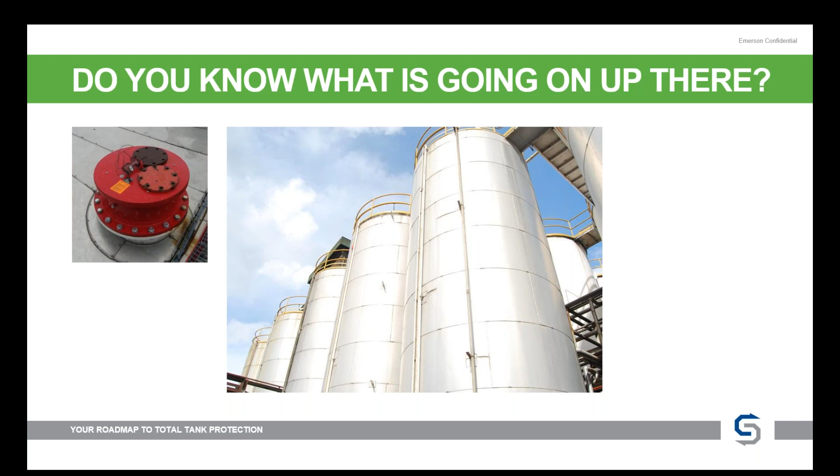All too often we find these devices are orphaned. They're set up and then not part of any formal maintenance program. Measurement needs to be accurate. You need to be confident in each one of your measurements. If they fail, you can overflow your tanks.

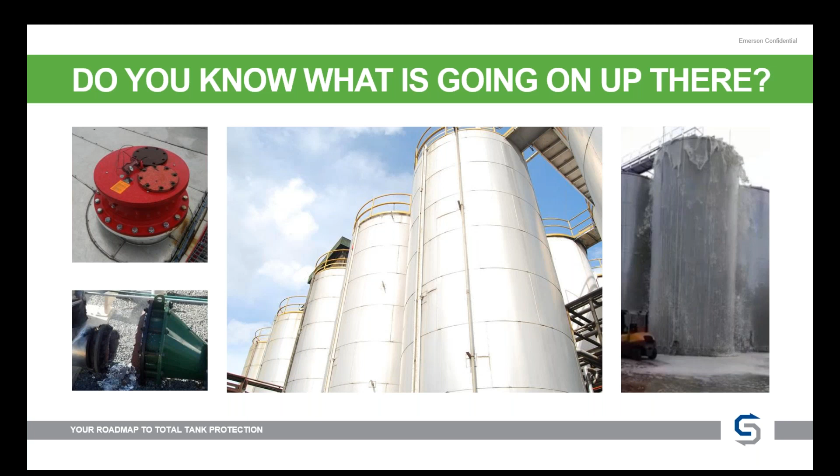Some tanks or applications also require special equipment like flame arrestors or tank blanketing equipment. All these devices must work together to meet the operational and safety needs of your tanks and your plant.

Before we talk about tank top devices, we must first know what type of tanks are out there. There are 3 types of tanks: open top, fixed roof, and floating roof. The important difference is as we move from open top to floating roof, we ultimately improve safety and reduce product loss by controlling or trying to eliminate the vapor space in the tank. However, as we move from left to right, the cost of the tank does increase.

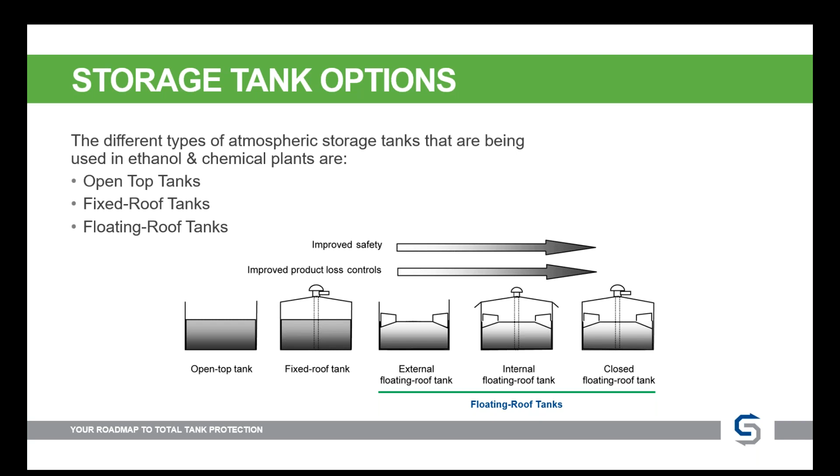One of the most common types of tanks is a fixed roof tank. By putting a roof on a tank, we can keep the elements like rain and snow out of the tank, but we must now somehow control the vapor space within the tank. If the products in the tank are non-hazardous, then maybe a simple hole with a rain cover would do. However, in most cases, we want to keep our products from evaporating, and therefore pressure control devices are required.

Typically, this is the type of tank we expect to see in fermentation. Some plants, however, do use this type of tank as their product storage tank.

Internal floating roof tanks are designed to keep the vapor off of the tank. In order to control the vapor space between the floating roof and the fixed roof, large vents are installed on the top edge, and natural drafts remove any vapors. Typically in the ethanol industry, we see this style of tank used for final storage and storage of flammable products.

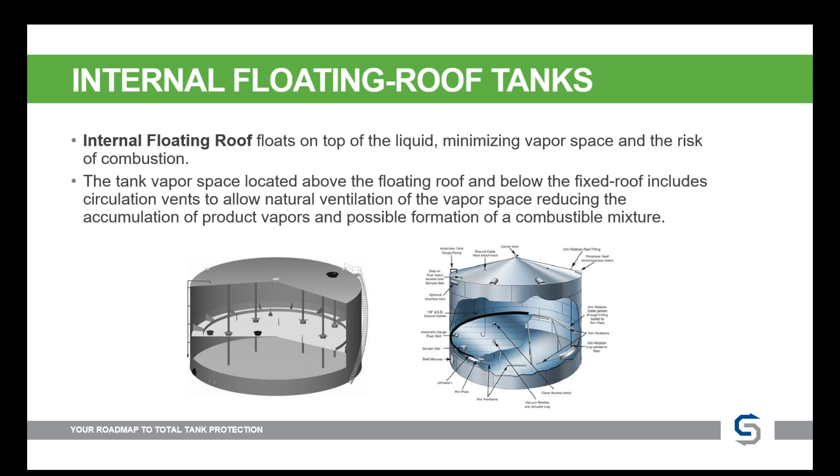Today we will focus on fixed roof tanks. Open-top tanks and floating roof tanks don't require as many protection devices.

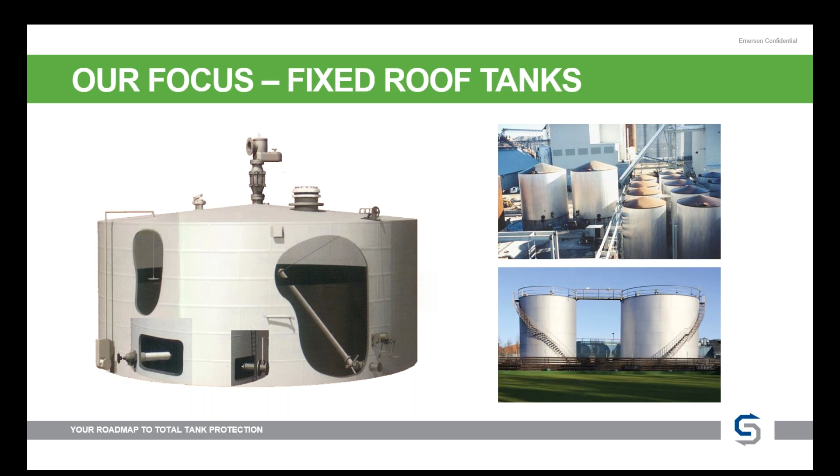When it comes to sizing, there are a couple of terms that are useful to understand. These are in-breathing and out-breathing. Out-breathing is when the vapor space heats up and expands, or when the liquid is pumped in. This raises the tank's pressure, and the tank needs to breathe out, thus the term out-breathing. We also need to consider the expansion due to the fermentation process.

In-breathing is when the vapor space cools down and contracts, or when liquid is pumped out. This lowers the tank pressure, and the tank needs to breathe in, thus the term in-breathing. These are the things that we consider when we're sizing conservation and emergency relief vents, but the calculations are determined by the API standards.

There are many different standards for atmospheric or low-pressure storage tanks. API, American Petroleum Institute 620, is most commonly used. This covers the design and construction of large welded, low-pressure tanks. Temperature ranges from -325 degrees Fahrenheit to 250 degrees Fahrenheit, and pressure up to 15 psig.

API 2000 covers venting atmospheric and low-pressure storage tanks. API 2000 guidelines help to determine how to size pressure relief devices to ensure safety. This is the specification that we use when we size pressure relief devices.

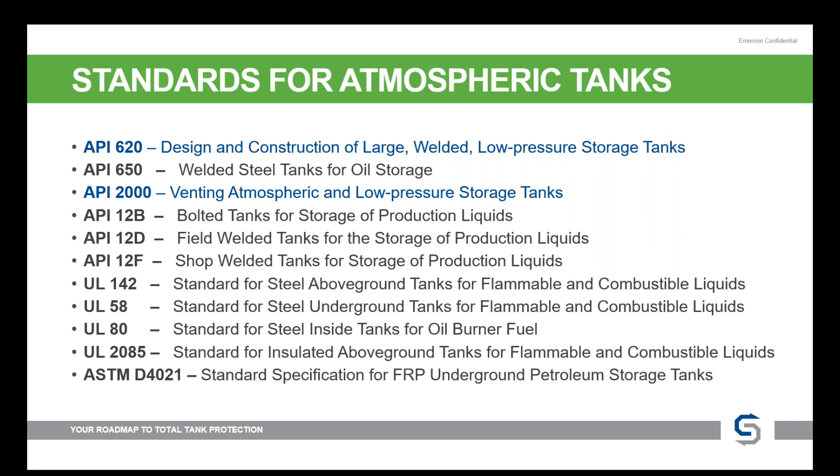The API 2000 7th edition main body is used to calculate the capacity for conservation vents. For fermentation processes, we can assume non-volatile liquid and no tank blanketing regulator, but we do need to consider the CO2 generation from the scrubber failing or shutting down.

As you can see, we do require the latitude and to confirm whether the tank is insulated to complete the calculation. Also, standard margins are applied to the pump-in rates depending on whether they are volatile or non-volatile liquids to determine the capacity of the valve.

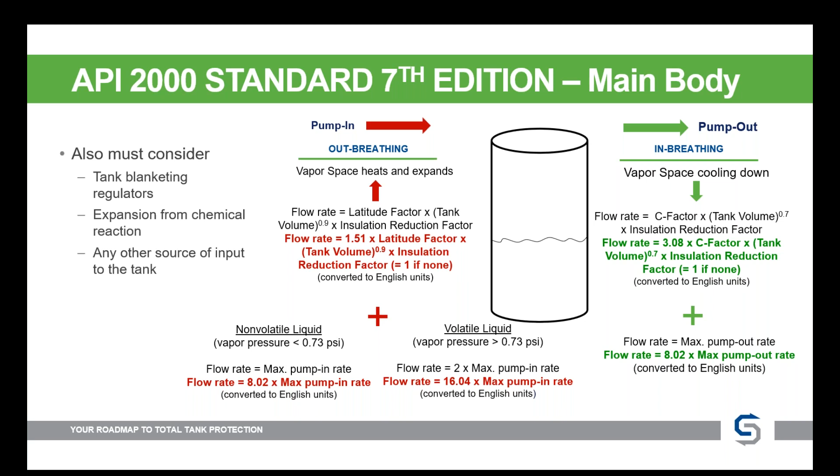It must be a storage tank that is uninsulated with a maximum operating temperature of 120 degrees Fahrenheit and with a tank volume of 180,000 barrels or less, and as mentioned, the characteristics should be similar to gasoline.

For fermentation tanks, since the liquid is non-volatile, we can still use the main body calculation for emergency relief vents. We can size for both the main body and Annex A in our software, SoftCalc.

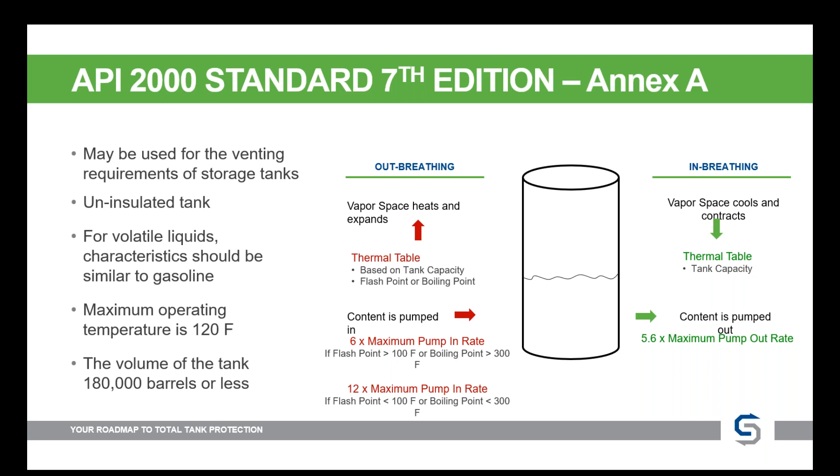All right, we are going to dive into conservation vents and emergency relief vents.

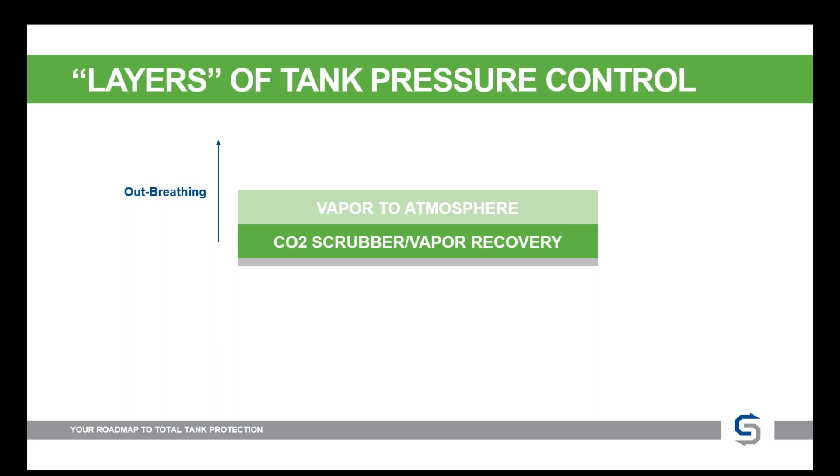Our base layer, when we're looking at outbreathing, and like Rhonda said, this is when contents are being pumped into the tank, so we have to breathe vapors out. The base layer is going to be our vapor recovery regulator, or common to fermentation, a CO2 scrubber, just pulling a vacuum. The next step is vapor to atmosphere, or what we would consider our breathing layer. Then finally, we have emergency venting, which is the last step before we reach a tank rupture.

On the inbreathing side, this is when contents are being pumped out and we have to draw vapors back in. We sometimes have a tank blanketing regulator for blanketing gas inbreathing. The next step is oxygen inbreathing from our conservation vent. And then finally, we have emergency inbreathing from our emergency vents before we have a tank implosion or sucking a tank in.

So we're going to start looking at what we consider the breathing layer, and this is conservation vents. Conservation vents are also sometimes called breather vents. You'll commonly hear me refer to them today as PVRVs, which stands for pressure vacuum relief valve. We don't like to abbreviate conservation vent to CV because it typically stands for control valve.

But there are 2 types of conservation vents out there. You can either vent to atmosphere or pipe away so that you can reclaim the vapors or send them through a scrubber.

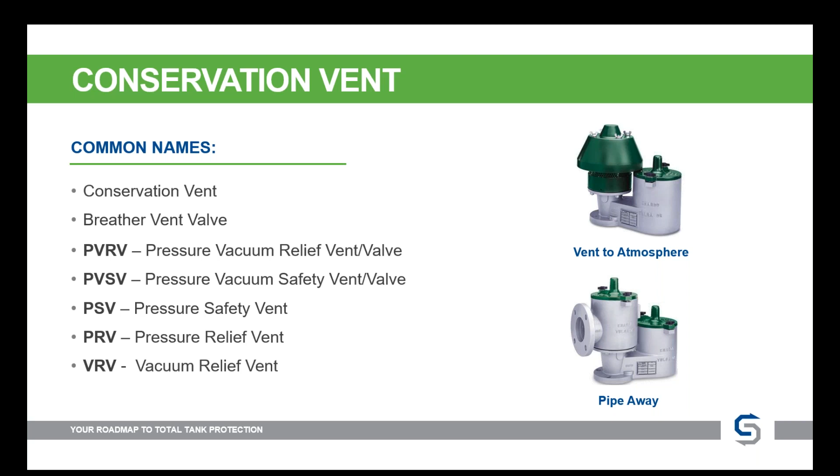The nice thing about these devices is they are very simple. Basically how they work is you have a pallet that has a tight seal around the bottom, and on top of that pallet you stack weights to achieve a set point. If tank pressure builds up over that set point, like you see in the top right image, the pressure will lift the pallet and the vapors are able to escape the tank so the tank can restore to its proper operating pressure.

On the flip side, the lower image there, we have vacuum relief as well. It works a little bit different. We still stack weights on the top side to achieve our set point, but what happens is as the tank's pumping out, if we need vacuum relief, when it pulls the vacuum, it'll actually lift that pallet up and allow atmosphere or oxygen to breathe into the tank.

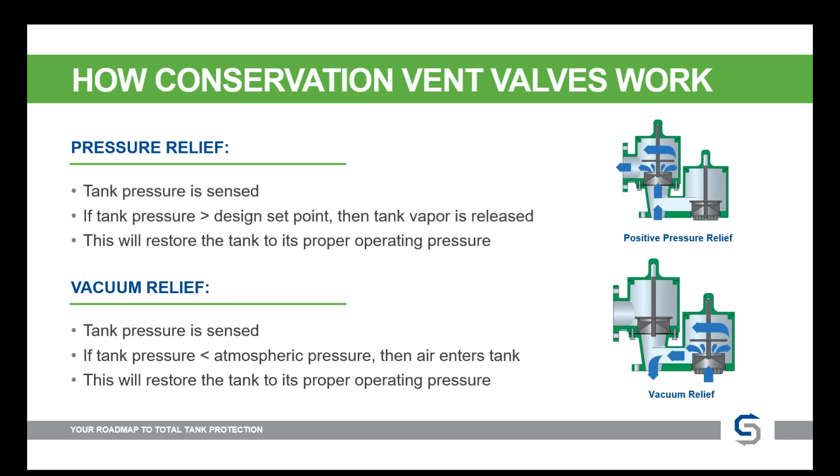There are various different types of conservation vents out there. Most of what we see is going to be a conventional lift. The main thing to keep in mind with conventional lift conservation vents is that they require a certain amount of pressure over set point to get fully open.

We would consider this overpressure or buildup pressure. There are other designs out there manufactured so they go full open at 10% overpressure or less, and we typically call those full lift or pilot operated.

So like I said, conventional lift PVRVs are the most common ones we see across the industry for biorefining and ethanol, just a standard flat pallet, and they open gradually as the tank pressure increases.

Full lift is a design that utilizes what's called a huddling chamber, so they go full open at 10% overpressure. However, they do require a blowdown range so that they can reseat. One other advantage to full lift is that they are typically a little bit tighter sealing. They'll leak only up to 1/2 of an SCFH at 90% of set point, whereas conventional lift can leak up to 1 SCFH at 90% of set point.

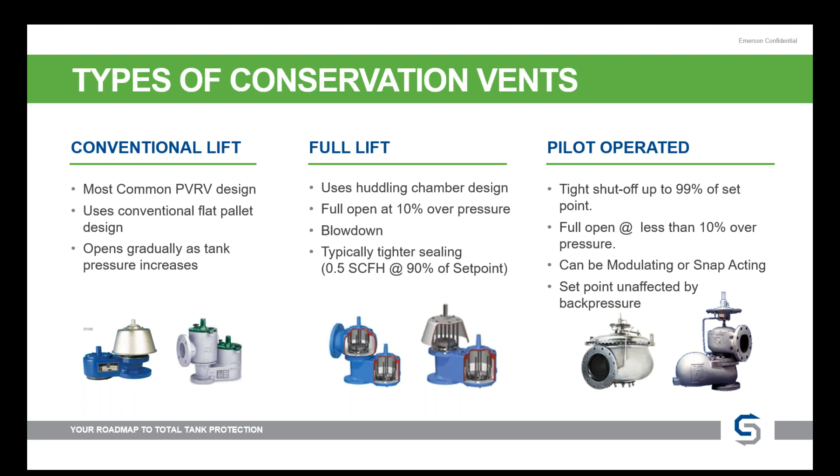And then finally, we have pilot operated. These devices are more similar to your PSVs throughout your plant. They have tight shutoff at up to 99% of set point. They go full open almost immediately if you use snap acting, or we can have them set up for modulating control. So while you get increased capacity with full lift or pilot operated, as you move left to right here, you also increase the cost of the device as well.

Regardless of the style of conservation vent that you use, there's a variety of issues that always seem to affect any users. One of the first ones is freezing or sticking.

This is commonly due to poor material choice. What can happen is you get moisture or water in there on those days when it's about 28 degrees, and it'll freeze the pallet to the seat. Then the pallet is unable to lift, and you run the risk of your tank overpressuring or underpressuring and sucking in. It's also common to see this if there's any debris in the vapors that can stick or hang up on the materials themselves, or if they're near another system that has nasty debris on it. That'll gum everything up, and then they're unable to work.

One way you can deal with the freezing is by insulating them and then either steam or heat tracing them. Obviously there's additional cost with that. Some manufacturers will have special coatings or special materials you can utilize inside of them. Or eventually you're just going to have to get to a point where you have an increased maintenance interval and need to take a look at these more frequently.

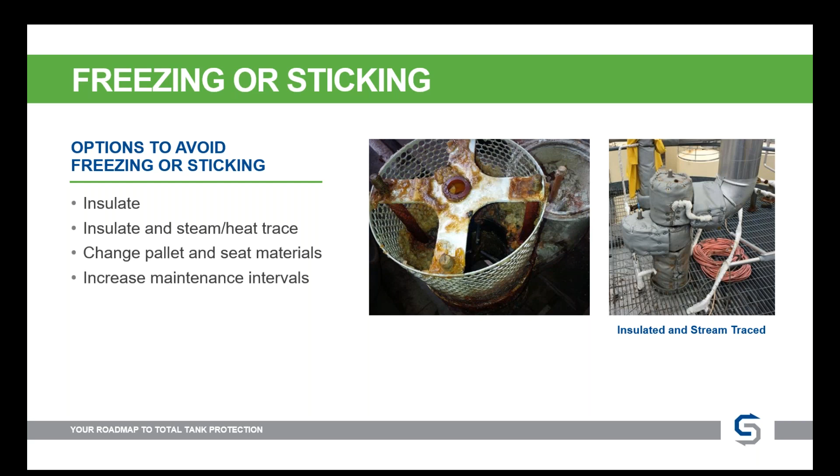Another common issue that we see is excessive leakage. Damages to the seat, where the pallet has to create a tight seal, can create a leak path so that you're either getting atmosphere into your tank or allowing your process to leak out. This can be an issue if you're trying to keep atmosphere out of your product or if you have environmental regulations that you need to keep.

The majority of the conservation vents that we see installed have a cast-in seat. This means that if you damage that seat in any way, basically what you have to do is remove it from service and machine it down, or take a lapping block out into the field and machine it until you have a like-new seal.

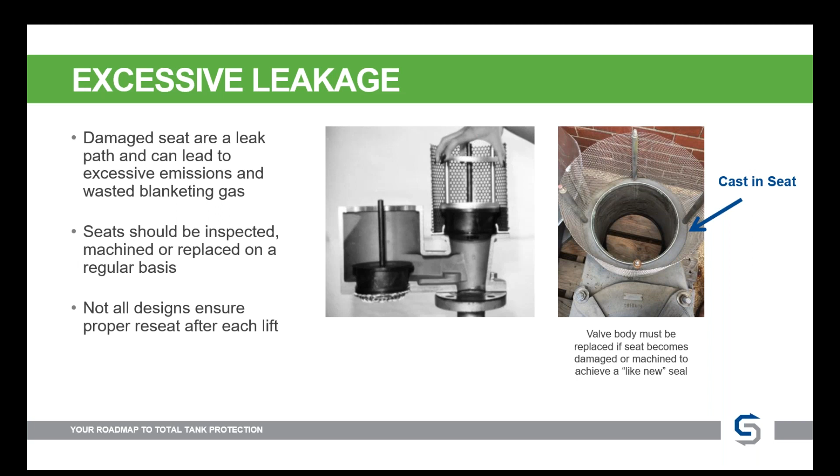There are also a lot of manufacturers on the market that have designs that allow the pallets to move back and forth as they lift. Once that happens, they don't always get a proper reseat, and that can create a leak path as well. So these are all things you need to watch out for and check when you're doing your regular inspections.

And then finally, confirmation of the conservation vent actually working. This is similar to any product in your plant - you'd like to know if it's actually working properly. One way you can do this is just monitoring the pressure inside the tank. You can set limits for high and low and make sure the tank doesn't exceed those limits.

Option 2 would be monitoring the position of your conservation vents, which some manufacturers are able to do. But ideally we'd be in option 3, which is a combination of the other two, where you're monitoring pressure in the tank as well as the position of your conservation vent, so you know if it's opening at the right time and reseating at the proper time.

Emerson carries a variety of brands for tank protection equipment, but ENARDO is the solution to pretty much all of these problems. You can see on the left, we can outfit all of our ENARDO products with Rosemount transmitters, so we can feed back to your operating system or to a PLC what the position of the conservation vent is. ENARDO also has a patented Saber Guide system, so that we get nice, clean, repeatable seats every time that pallet lifts, and so we know we're not getting excessive leakage.

Finally, what I think really sets ENARDO apart from the rest of the market is they utilize PPS as the material for their pallets and their seats. PPS is a proprietary material that has phenomenal chemical compatibility - virtually nothing sticks to it - and it's also rated to -50 degrees. So when we're in the middle of a polar vortex, you can be confident that nothing's going to freeze to that and cause the pallet to be unable to lift.

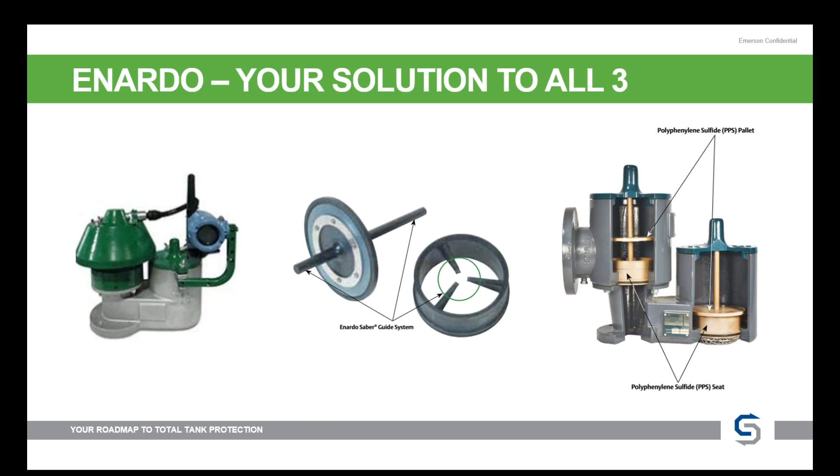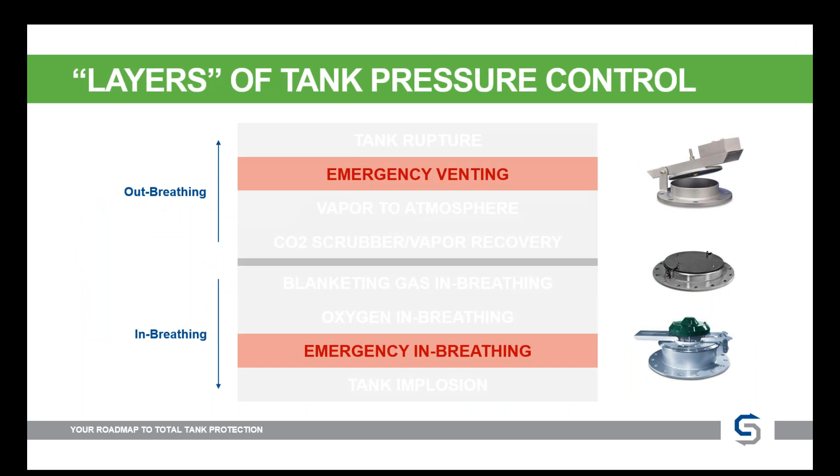Now we're going to move to the next layer up, emergency venting. Oftentimes people think of this just as overpressure protection, but we actually like to use emergency venting to protect on the vacuum side as well.

So some common names for emergency relief vents would just be an ERV. Sometimes you'll hear them referred to as an EPV RV, emergency pressure vacuum relief vent. And then finally, there's manufacturers that just call them a blow-off hatch.

The two basic styles are a vertical lift design and a hinge design. The vertical lift is just a really simple design. These are the ones that are considered blow-off hatches. Basically just a big chunk of metal over an open hole. Usually they'll put a tether on it so that if it does blow off, it's not going to end up in the break room.

But the one nice thing about ENARDO's vertical lift design that you can see there, I believe that's the model 2100, is it has guides to assist in reseating. And those guides can also be removed so that if you need to open that up to get access to the tank, you can still get that.

The hinge design, though, is really what we prefer to see. It's designed so that you get consistent reseating, and then we can also have emergency vacuum capability on these as well.

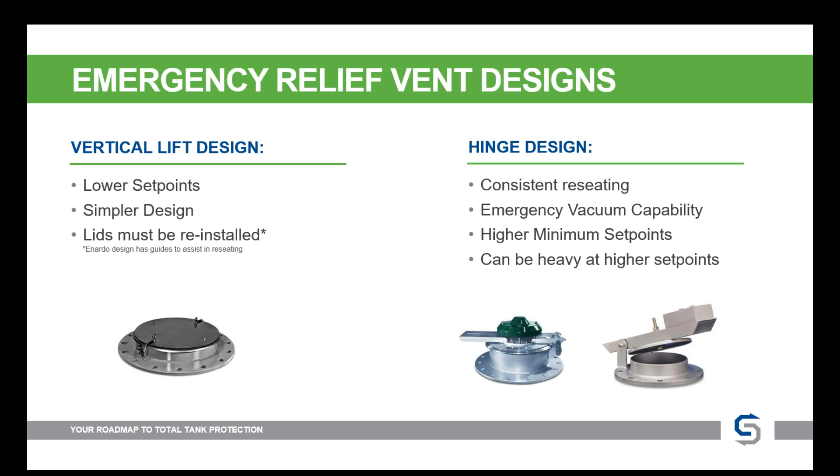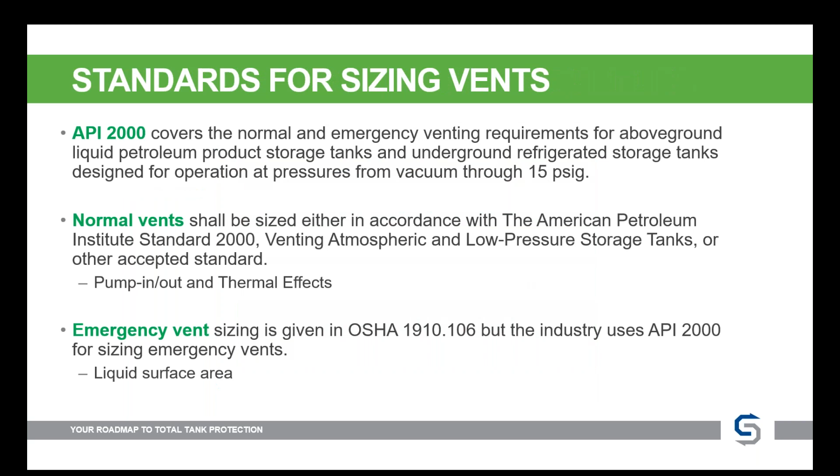So it's important to consider how the conservation vent and the emergency vent work together, and obviously we need to take that into account. Like Rhonda said, we use API 2000 as the standard for sizing all of our vents. API 2000 main body for the normal vents, and then the emergency vents, if it's a volatile liquid, we'll use the Annex A. But more importantly, what we have to look at is the buildup required for these to hit capacity.

So this is an example of a flow curve that was test data ran by an independent laboratory, and we have these for all of our products. So if you look here, we've got flow rate along the bottom axis, and then pressure in inches of water column along the vertical axis, and then you can see the curves for a 2-inch up to a 12-inch conservation vent.

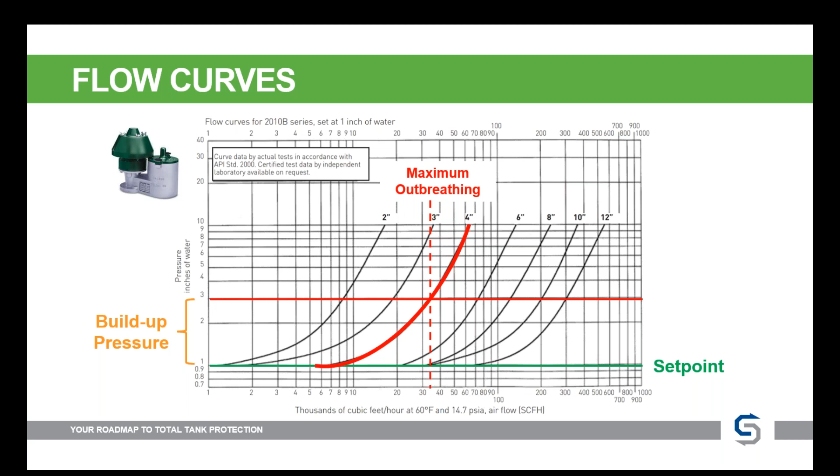So if we're looking at a 4-inch conservation vent set at 1-inch water column, basically what we're going to do is see, okay, if we need 35,000 cubic feet of air per hour, we can see that we can achieve that at 3 inches water column of pressure. And basically what that translates to is that's the 2-inch water column buildup, or 2-inch water column of overpressure, that we need above the set point to make sure we can hit capacity.

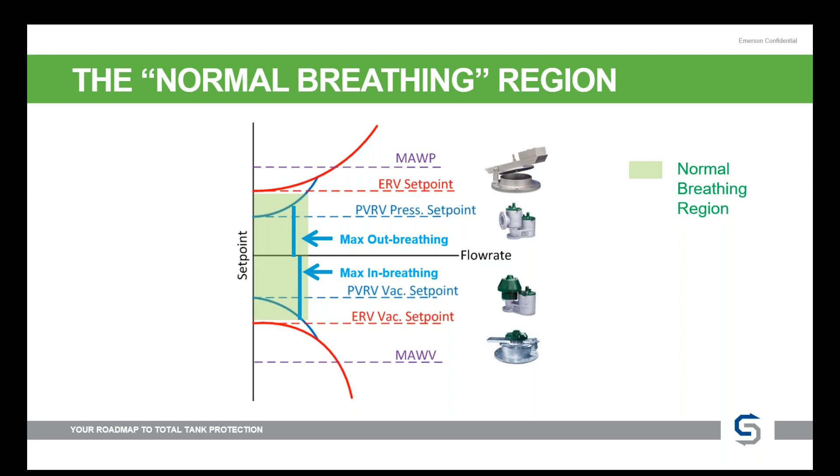So then we have to look at that in respect to the emergency relief vent. And we consider that green range there our normal breathing range. The normal breathing range is where we want to be for our basic operation. So essentially, we want to design these tanks and all the equipment on them so that the emergency relief vent never has to lift.

So if we can stay in that normal breathing range with our conservation vents and make sure that we hit our max out breathing at a decent point, we'd like to keep that at roughly 75% of the emergency relief valve set point. And once again, that's just to make sure that that emergency relief valve doesn't have to lift or open up for vacuum unless it's absolutely necessary to.

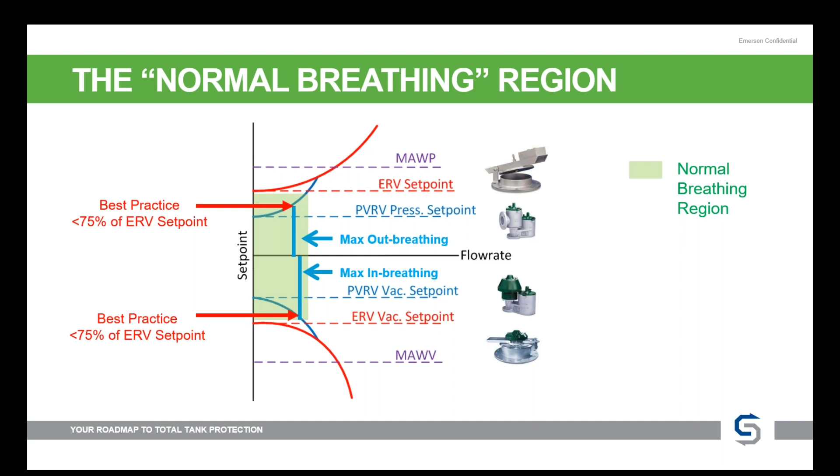The one that we need to take into consideration is if it's an existing tank, obviously you guys have connection sizes that you need to keep in mind. We don't want to have to modify tanks every single time we swap out a valve. And if needed, this is where we can move to our full lift or our pilot operated designs. If we need extra capacity out of the same connection size, we can utilize those other technologies to achieve that without having to modify the tank.

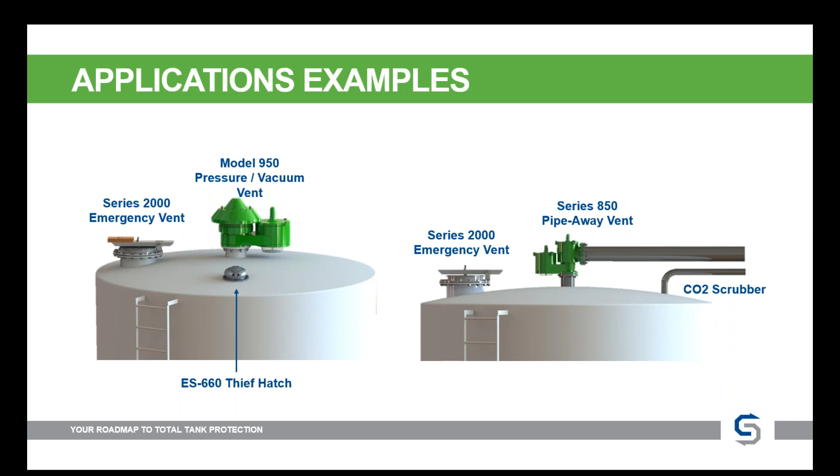While it may seem you never need them, we've seen simple things like somebody was on top of a tank painting it, and they put a trash can or a trash bag over the conservation vent. They left it up there, put the tank back into service, and all of a sudden it sucked the tank in because it wasn't able to in-breathe through the conservation vent. So simple things like that are why it's always a good reason to have a second layer of protection.

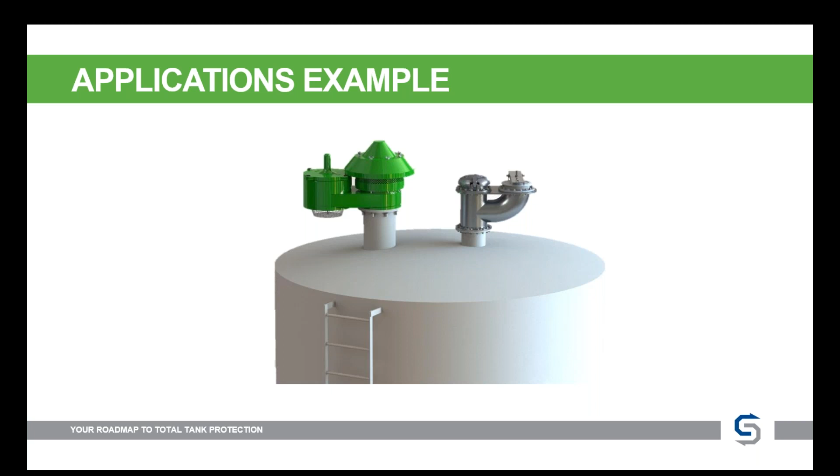Here's another example. If we get into a scenario where we need an additional connection and we can't make modifications to the tank, it is possible to do some custom piping setups like that, and we can get those with the products mounted on them as well, so that way you can get more devices if you're limited by connections.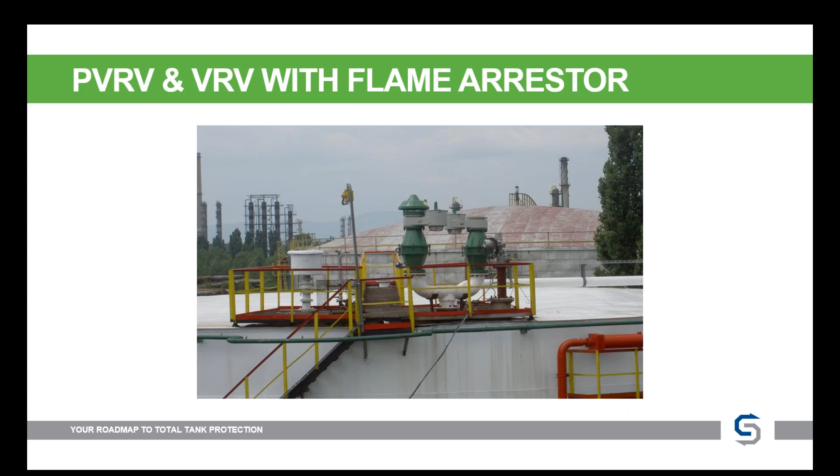And while we're running through all of our sizing and selection, all those questions we're going to ask you guys, it's everything that we're putting into what's called ENARDO Soft Calc 2. If anybody in your plant is a do-it-yourselfer, this is available for download online. It's a free software we offer. Very simple to use. Basically, it's going to ask you which product family you're in, ask you to select the product you want to take a look at, and then give you a list of all the required inputs.

You can see there you can choose between API 2000 7th edition and then Annex A. You can switch between the different product families, and this will calculate the required outbreathing and inbreathing that you need, as well as recommend which size of product you need to be in and tell you how much overpressure you need to hit that capacity. What's really nice is then you can even choose the materials of construction you'd prefer, and it'll kick out a model number that you can send to us.

So now we're just going to go ahead and roll straight into tank blanketing and vapor recovery regulators.

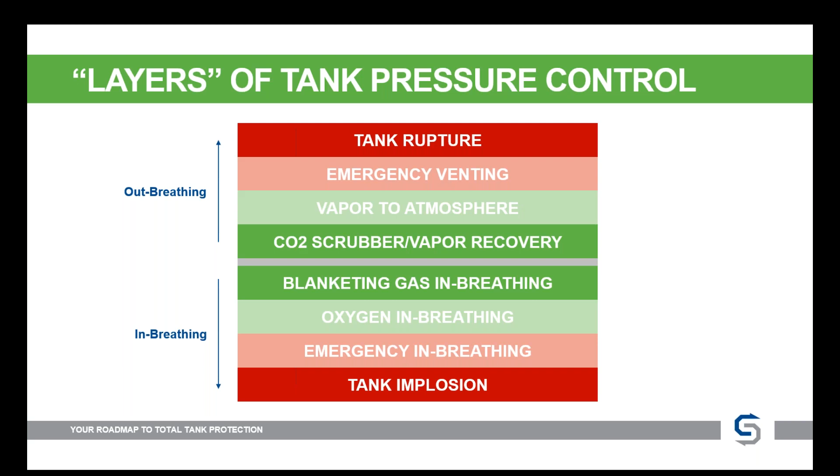So on the layers of tank pressure control, this is the base layer. While this isn't common to see in fermentation, we do see this a lot of times on your volatile liquids or your finished product storage tanks. If you're not using a floating roof design, we'll see tank blanketing and vapor recovery.

Starting with blanketing, this is also known as padding the tank. Basically, all we're doing here is taking an inert gas, typically nitrogen, and putting a blanket of that on top of the liquid, so we avoid outside air, mainly oxygen, from being breathed into the tank. That way, we're not allowing oxygen to mix with the combustible vapors and possibly ignite inside that tank. It's also going to protect if there's any possibility of the liquid spoiling if it comes into contact with anything in the atmosphere.

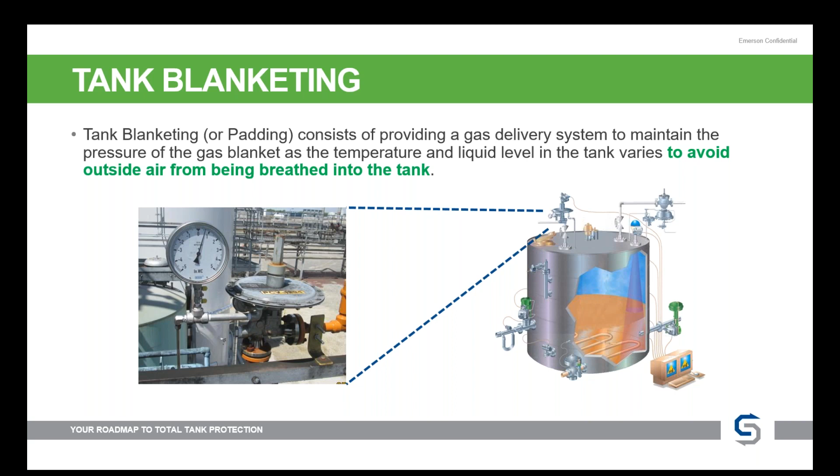These tank blanketing regulators, you can see one there on the left. That's a Fisher ACE 95. They operate like any standard regulator, but you're going to notice that they have very large diaphragms. That's because they're extremely accurate and they have to operate at really low pressures. On the gauge there, you can see this one's controlling down to a half-inch water column.

So like I said, they operate like any other regulator that you see within your plant, whether it's on a nitrogen line or your natural gas line. All regulators have three essential elements: a restricting element, which is a plug and orifice or a plug and seat; a measuring element, the diaphragm; and a loading element, which uses a spring so you can wind in your set point.

The regulator senses downstream pressure, in this case the pressure inside the tank. That pressure registers on the diaphragm and moves it up and down, which is connected to the plug, moving it accordingly. So if pressure in the tank drops, the diaphragm moves down, the plug moves away from the orifice, and we get nitrogen breathing into that tank to keep it at the proper pressure.

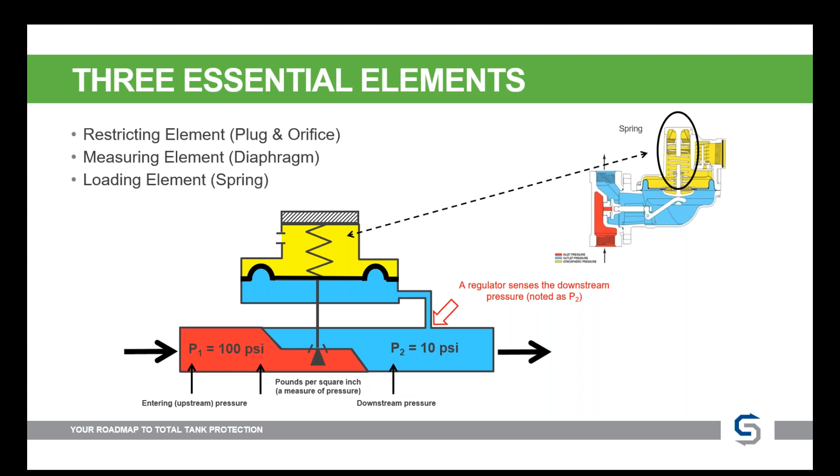On the opposite side, that was for inbreathing. When liquid is being pumped into the tank, we have vapor recovery, similar to a CO2 scrubber, on the outbreathing side. Once again, it's basically just a back pressure or relief regulator, the only difference being we're sensing pressure on the inlet side. So we're sensing pressure in the tank, but as pressure builds past a certain point, the diaphragm moves up and compresses the spring, lifting the plug away from the orifice and allowing those vapors to get out of the tank.

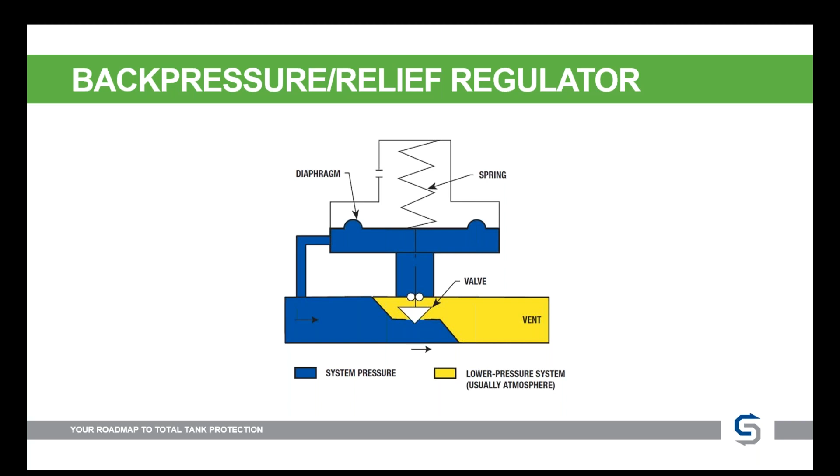So vapor recovery, also known as DEPAD - once again, we have tank blanketing, or PAD, and vapor recovery is DEPAD - is essentially making sure these vapors don't just breathe out to the atmosphere. If they're not going to atmosphere, typically we'll see them go to a scrubber, sometimes a vapor recovery unit, or it's pretty common to see them just go to a flare as well.

One thing to note is that a vapor recovery regulator is typically much larger than a tank blanketing regulator, just because it has a very low pressure drop across it. So while you may have a 1-inch tank blanketing regulator, you could have a 2-inch or even up to a 4-inch vapor recovery regulator.

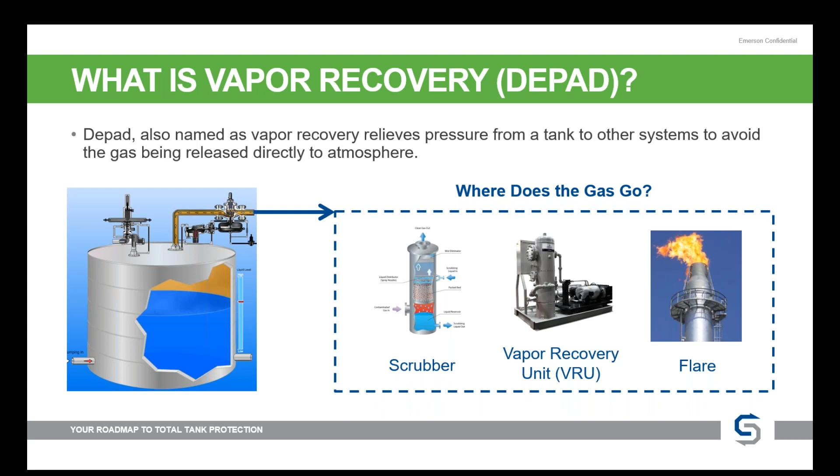All right, so we've learned about why it's important to protect your tanks from overpressuring. Now we'll talk a little bit about why we need to measure level of the tank to prevent anything from overflowing out into your plant or into your containment areas, and how to do that best.

I'm going to start with differential pressure, mostly because it's the most common one still used in the marketplace. It's very reliable and well understood. There are no moving parts, and because it's based on pressure measurement, it doesn't care about anything going on in the vapor space of the tank, or any foam or agitation that might be occurring. It also doesn't care about any internals in the tank, whether baffles, mixer blades, or heating or cooling coils. By using diaphragm seals, you can extend the use of your differential pressure measurement to extreme temperatures with different fill fluids, or corrosive or dirty processes with different coatings or metals on the diaphragm seal.

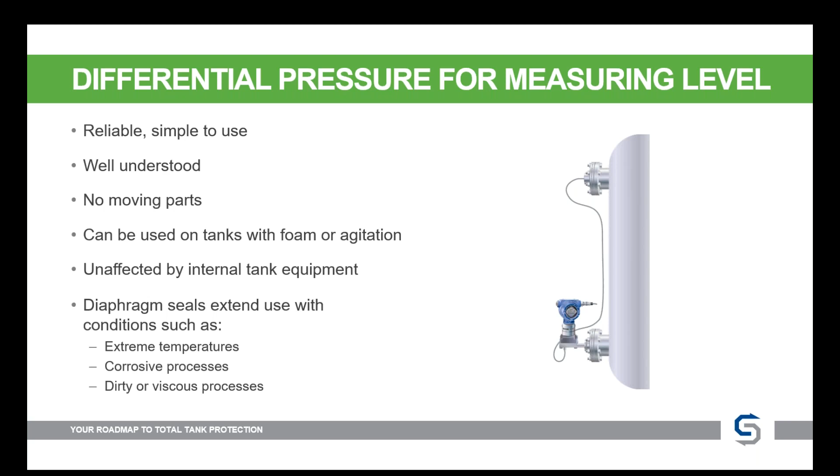So you may be thinking, great, differential pressure sounds awesome, why don't I just use that everywhere? Well, one thing to be concerned about is that because it's a differential measurement, it often requires two taps, and if you're using capillaries, those can get very long and difficult or expensive to install. If you've got a fermentation tank where the density of your product is changing, that will cause the pressure the transmitter sees to vary as well, which will give you varying level measurements back in the control system.

Another thing to be concerned about is any variation in ambient or process temperature will have an effect on that capillary fill fluid and shift the pressure seen by the diaphragm on the sensors as well.

It is only good for liquid, so if you're trying to measure a solid material like corn or ground powder, differential pressure is not going to measure that. And if you've got recessed nozzles that have the capability of plugging or coating with a suspended solid, that can mess up the reading as well.

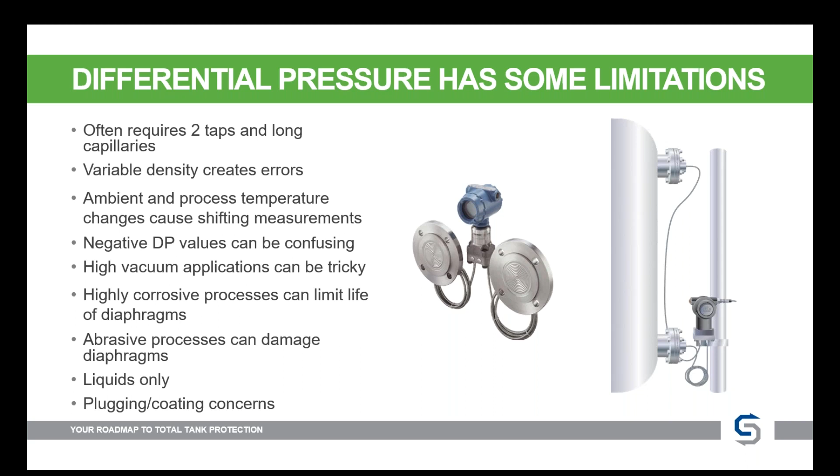The next technology we'll talk about, grouped together because they're based on a similar principle, is guided wave and non-contacting radar. They're both very good for industrial level measurement. They're based on a dielectric principle, so changing densities of your process media won't affect the reading. They're able to withstand turbulence, vapors or dust in the vapor space, and any sort of geometrically difficult vessel, so it doesn't have to be a perfectly round or cylindrical vessel for them to work. Because there are no moving parts, they're easily installed in the chamber and can replace a mechanical device that might be causing maintenance issues or sticking.

Guided wave is also very good for interface level measurements because it's guided down the probe. It'll see the top level measurement and then pass through that low dielectric top media to see the interface between it and your bottom liquid media, like a corn oil separation tank where you've got corn oil on top and water on the bottom.

We're also able to use guided wave radar for saturated steam applications. Normally the dielectric of air is one, but if you're boiling off steam or hydrocarbon, that changes the dielectric of your vapor space and slows down the signal. With our DVC radars, we're able to compensate for that and still give an accurate reading in saturated steam or boiler applications.

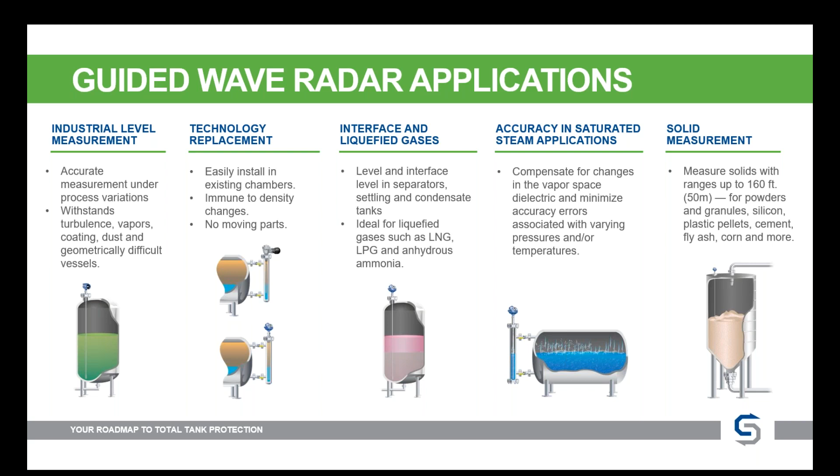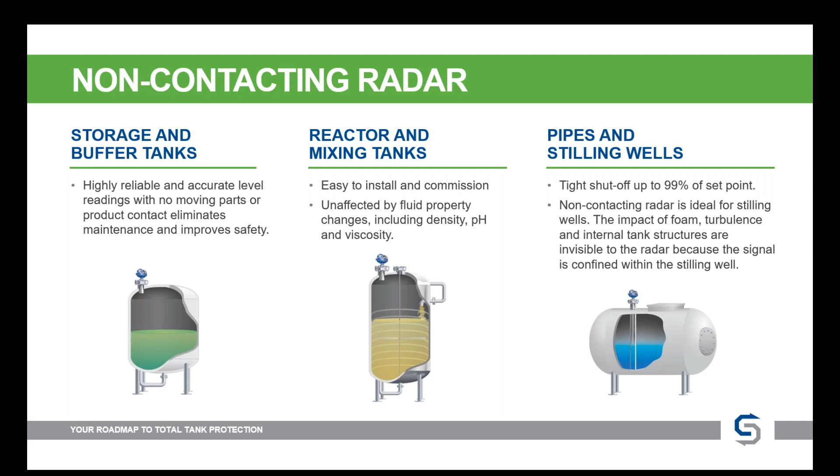We can also use non-contacting radar in large storage tanks, reactor and mixing tanks. There's no concern with a non-contacting radar hitting any impeller blades that might tangle up a guided wave radar probe and even pull it off. We're also able to mount non-contacting radars on top of pipes or stilling wells to give a more even surface inside a potentially turbulent vessel.

Some of the advantages of radar over other level measurement technologies: it's a top-down measurement, so it's typically easier to add a nozzle to the top of a vessel instead of trying to cut into the side or bottom of the vessel.

Again, it's not based on density measurements, so any density changes inside the vessel won't affect the reading. And it's virtually unaffected by dust, vapor, or anything going on in that vapor space that might affect, say, an ultrasonic measurement. There are no moving parts, so there's nothing to worry about getting stuck or causing maintenance headaches, and you're able to use it across liquids and solids measurements. It's not tied to a single process media.

Guided wave itself specifically, because it's based on a probe, you don't have to worry about an antenna or parabolic antenna going into the vessel, so it can handle smaller process connections. You're also able to do interface measurement with guided wave radar that you can't do with non-contacting radar, or that's difficult to do with DP level.

But like any level measurement technology, there are a few other considerations or drawbacks to radar technology. For guided wave, because it's contacting, if you've got a corrosive or dirty fluid, you need to make sure the probe has the right metallurgy or coating to prevent it from getting eaten away or broken. If there's any agitation in the vessel, mounting the probe in the correct location so it doesn't get tangled up, or securing it at the bottom so it doesn't get swung around and hit the side of the vessel, is a big thing to be concerned about.

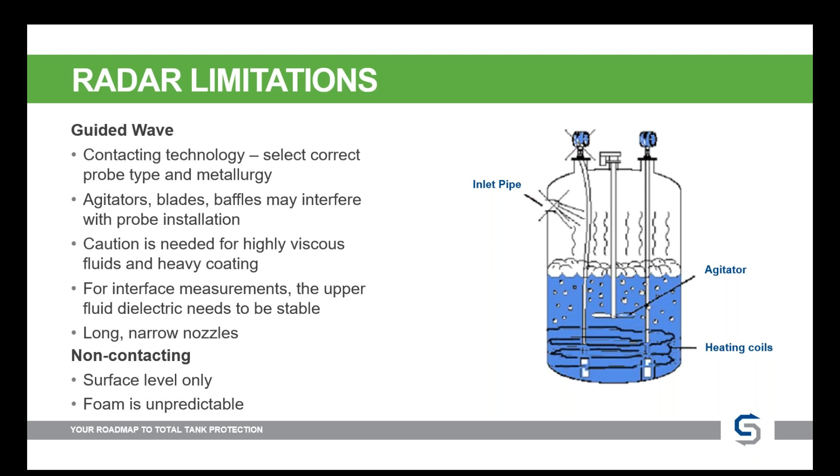So as far as mounting these to try and avoid some of those concerns, avoiding long nozzles or any sort of reduction nozzle where you can eat away a lot of the radar signal or cause false readings is a big concern. Our rule of thumb for nozzle height is to have it be less than the nozzle diameter plus 4 inches. That way you maximize the amount of signal sent down into the vessel.

You want to make sure not to have the probe or even the non-contacting radar right above the fill stream, as that will interfere with the level measurement and make it seem like your inlet pipe is where your level is, even if it's not actually the case. And any sort of contact between a probe and a metallic object will spoof out the signal and make it seem like the level is where the probe is contacting the metal surface and not where the actual liquid level is at.

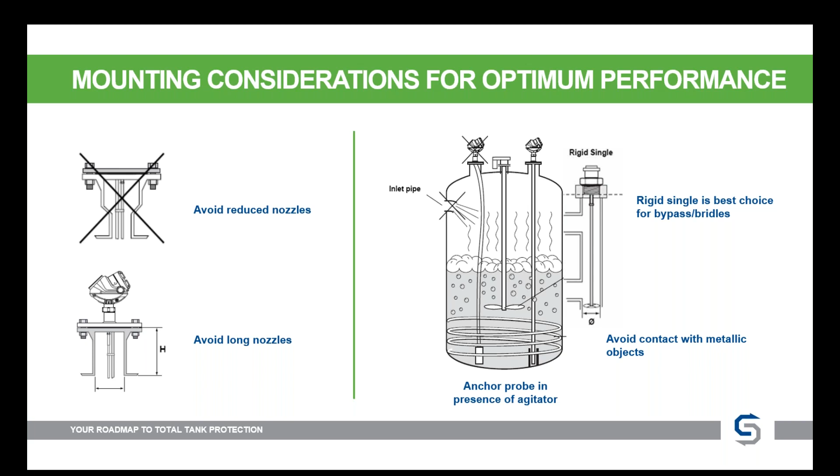We'll move on from radar into point level detection. Here at Rosemount, we have vibrating forks as our point level detection, so we'll talk about that.

There are a number of different offerings in our portfolio, from the compact 2110 model to the more standard, most commonly seen 2120. We also have a wireless 2160 model for remote regions where it's either difficult or exceedingly expensive to run conduit and wire out to a device. And we just recently came out with the fully wired HART version to give you advanced diagnostics back in the control room to prove that the fork is working without having to go out into the field to verify that it's still operating correctly.

Where should we use forks? Ideally, we would put them everywhere we would want a continuous level measurement as a backup reading, especially as a high level or overfill prevention. That way, if the continuous measurement locks up into a false reading or breaks for some reason, you still have a high level protection to make sure you don't overfill and flood your vessel or cause it to collapse.

We also recommend using vibrating forks or point level for pump control and run dry protection. That way you don't accidentally cavitate your pump by thinking there's liquid running to it when there really isn't.

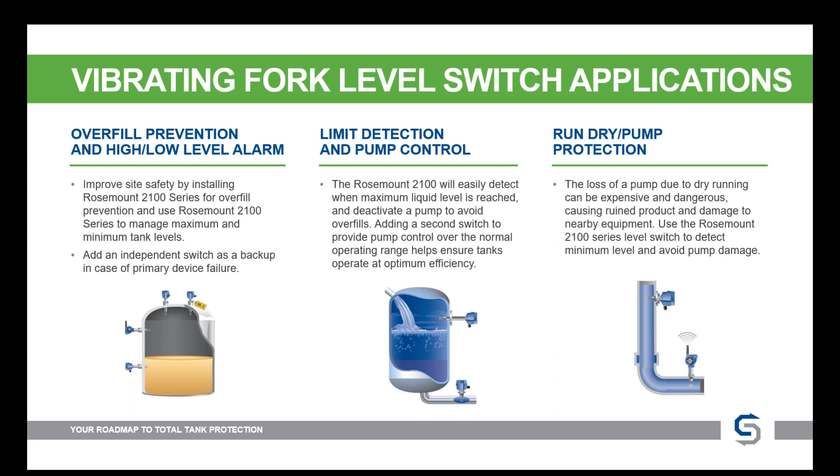Some other applications or concerns as far as installation. Similar to a continuous level device, you don't want to install a vibrating fork right under a fill stream or right next to an impeller blade, as those can either give false trips or potentially break the vibrating fork. If you've got a vessel where there's suspended solids that could settle out, if there's a recessed nozzle or buildup on the sidewall, we want to make sure that those forks are extended far enough into the tank that they don't get any sort of bridging to cause false trips.

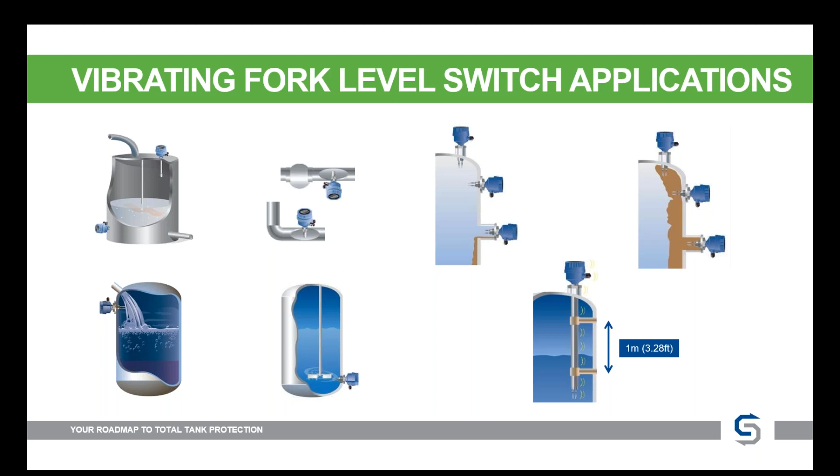And because we can do extensions up to 12 feet long on those forks, we want to make sure that every 1 meter or just over 3 feet we add support to avoid having that neck break off and then give you a false sense of security that the fork is still active when it might have broken away.

I'll touch briefly on our solids portfolio since there are still solids measurement applications in your facilities. We have 3 different continuous devices for measuring solids. I've talked already about guided wave radar and non-contacting radar for liquid level measurements. They can also be used for low dielectric solids measurements in small process vessels. Typically narrow silos work best for this. And for your larger inventory control offerings, we have an acoustic 3D solid scanner that is able to fully map out the surface of a solids silo or large inventory vessel to give better inventory management than a single point level device.

The last thing I want to talk about for level measurement here is an automatic tank gauging system. For a standard process vessel, having an automatic or even manual tank gauging system might not be necessary, but for large storage vessels or places doing custody transfer, having a full automatic tank gauging system for accurate measurement in your large final product storage vessels is a good idea.

Even if you have a density flow meter for custody transfer, if that ever needs to get pulled out of service or stops working, being able to have a backup reading with an automatic tank gauging system is a great idea. It gives you a full volume measurement, based on a system of several instruments around the vessel, not just a single level device.

With it being a full system, you get a level measurement device, and you measure the temperature of the vessel. This can either be a single spot measurement, or we offer a multi-spot device with a single penetration, as well as vessel pressure. From this, you're able to derive the gross volume inside the tank, as well as the density and mass of whatever liquid is inside your vessel.

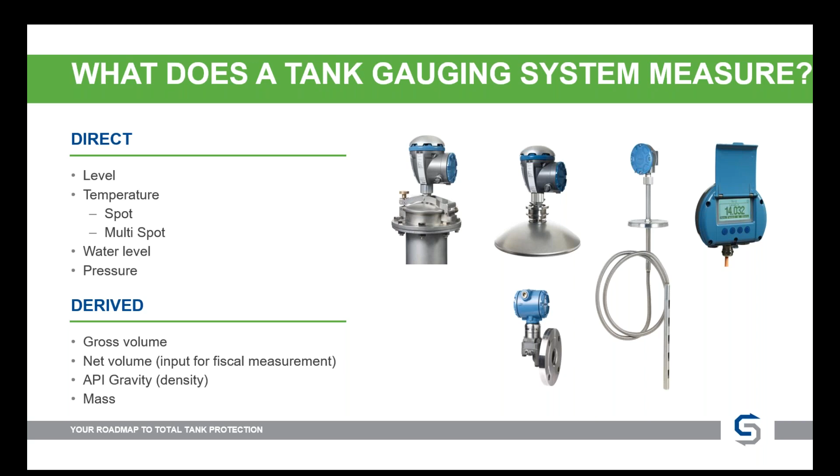By having automatic tank gauging instead of relying on an operator or technician to walk out to the storage vessel, climb up on top of it and try to do a hand dip, or relying on a mechanical device such as a float and tape, you're able to have improved safety because you're no longer climbing up on top of a vessel, opening a hatch and potentially being exposed to hazardous or noxious fumes.

You have better inventory control as you have a more accurate reading instead of relying on potentially inaccurate hand gauging or floats and tapes that may get hung up as they're trying to move up and down with the floating roof. And because you have a more accurate measurement, you're able to increase your utilization of the tank volume. And like I mentioned, it's able to be a good backup for any sort of custody transfer flow meter that you may have if that ever needed to get pulled out for service.

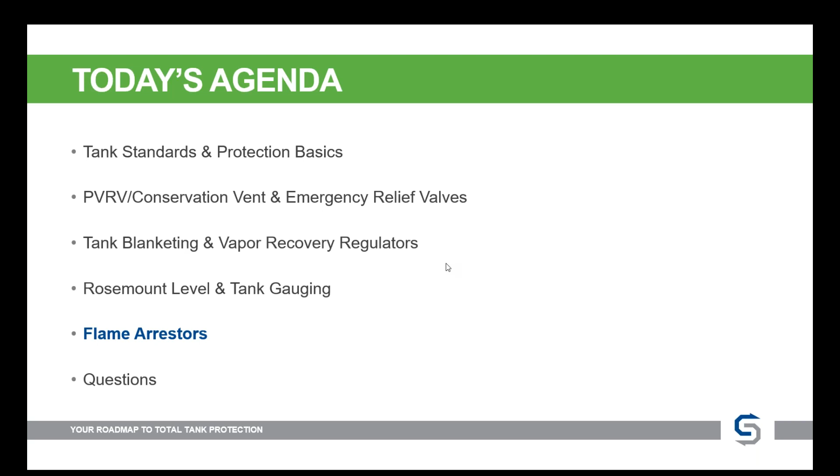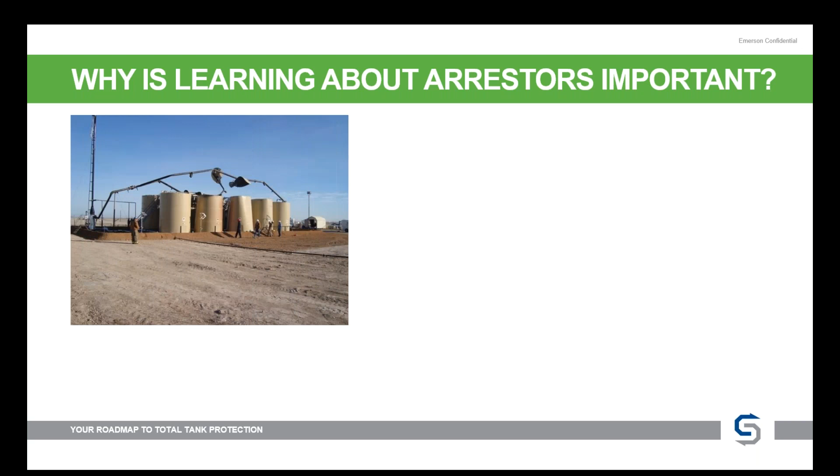All right, I think I've got control back here. So we're going to dive into flame arrestors. Why is learning about flame arrestors important? Well, obviously pretty much any biorefining or ethanol plant is going to have one on their flare somewhere in their loadout system. But really, it's important to consider flame arrestors because if they are not properly applied or properly maintained, their results can be catastrophic.

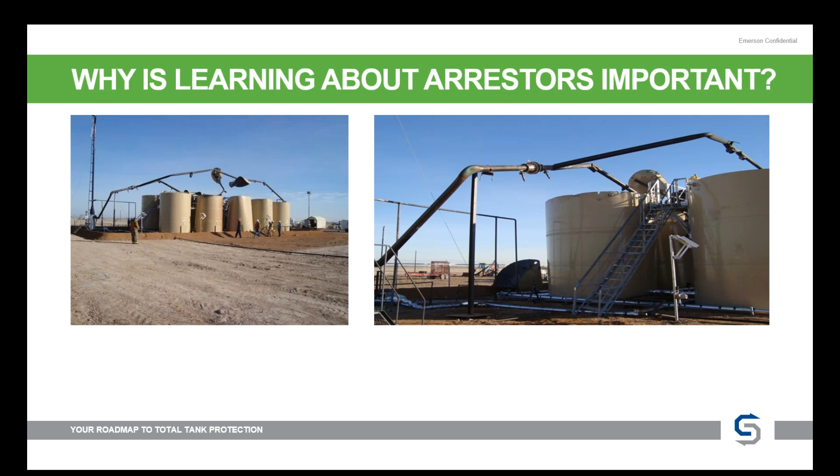These photos here, this was some type of petroleum loadout terminal. I think it was down in Texas or Oklahoma, and they had the wrong flame arrestor applied and managed to pop the lid off of every single tank in their facility. I was told the story that there was actually someone in that camper when these all went, and luckily he was unharmed. We don't know about the same for his pants. He probably had to go out and buy some new ones.

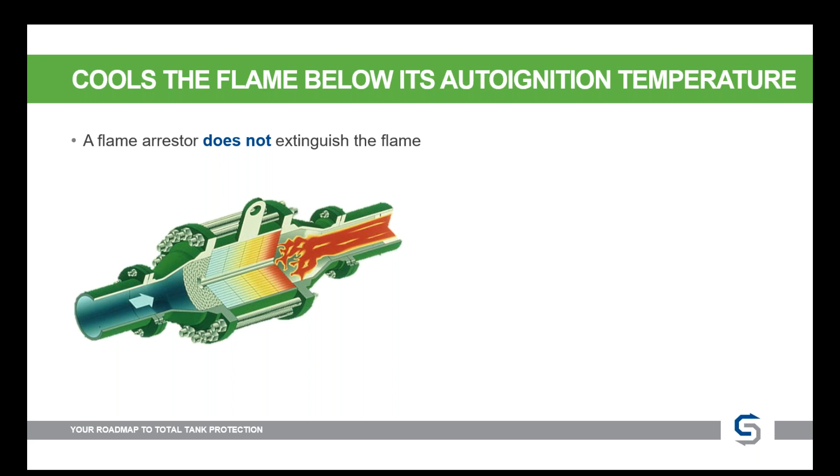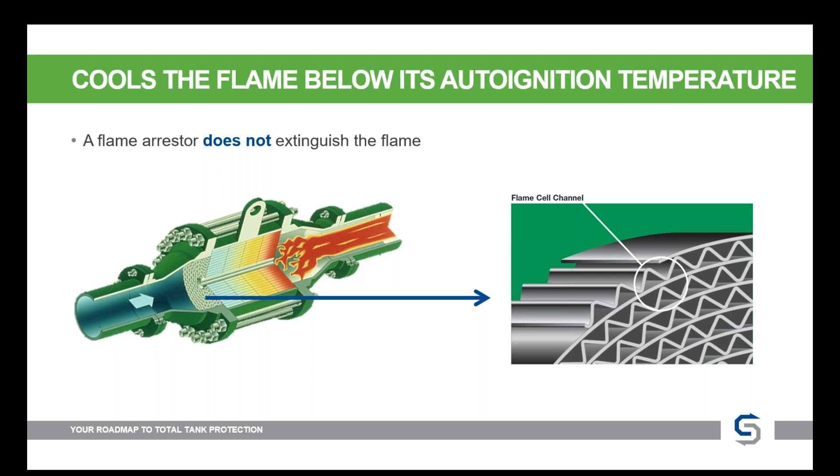It's important to remember that a flame arrestor does not extinguish the flame. Though that cell in there, which is really just crimped metal wound around, doesn't allow the flame front to pass. So it stops the flame right there and keeps the vapors on the other side below their ignition temperature. This way you stop the flame at a single point in the line and it doesn't spread throughout the rest of the system.

A flame arrestor is considered a passive safety device because it doesn't require any outside power or influence in order to operate. An active safety device, which can accomplish the same thing, something like a liquid seal, you have to make sure that you've got enough liquid in there so that it actually does its job. So flame arrestors can just give you a little more peace of mind because you know that they're going to be able to work.

Oh sorry, I jumped one too far ahead.

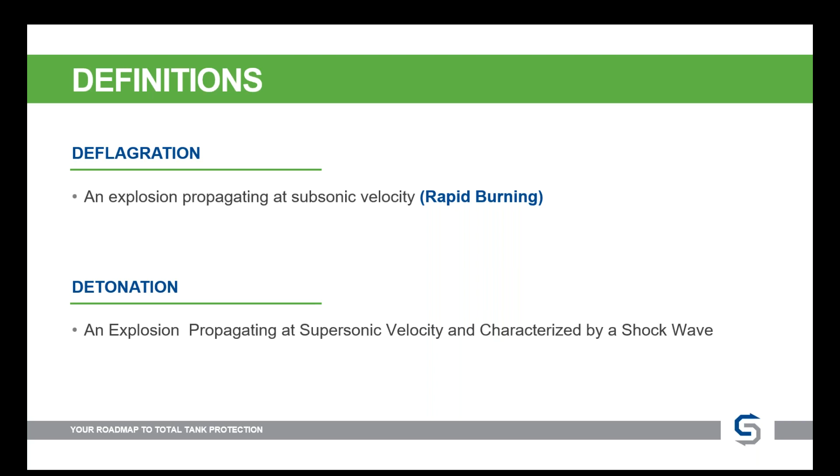As we talk about flame arrestors, there's two main terms that sound similar but mean very different things: deflagration and detonation. Deflagration is a flame front traveling through the pipe at subsonic velocity, and detonation is a flame front traveling through the pipe at supersonic velocity, typically characterized by a shock wave.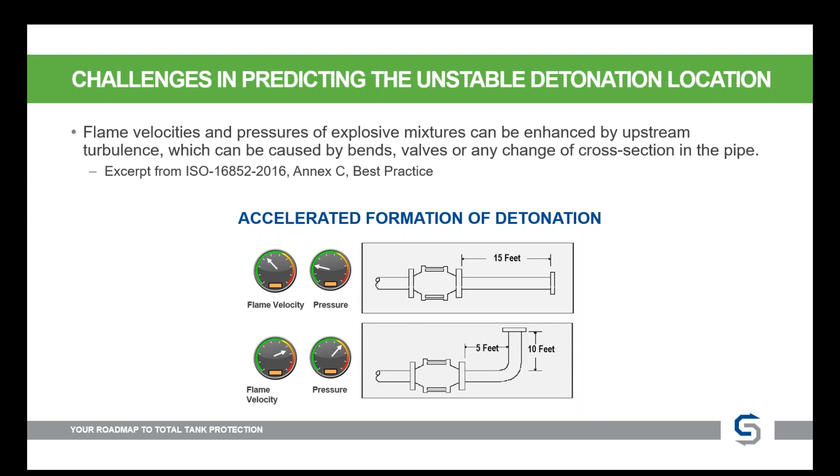How we move from deflagration into detonation is typically a factor of what we would consider run-up pipe on the unprotected side—the piping between your flame arrestor and the source of ignition. Here's an excerpt from an ISO code, but essentially what it's telling us is the more run-up pipe you have, and the more elbows or anything that changes the cross-section of the pipe, the more it increases not only the velocity but also the pressure of that flame front.

As we see that flame front traveling through the pipe, these are the different stages it goes through. Near the source of ignition, it starts as low pressure deflagration. It picks up speed traveling down the pipe, moves into high pressure deflagration, and then eventually, as it goes through an elbow or just has more run-up pipe, it's going to go into detonation.

It's important to note that before we can get to what we consider a stable detonation, it has to go through overdriven or unstable detonation. That's the single point on that curve that has the highest pressure and the highest velocity, so that's what we need to make sure we're protecting for.

When we look at ENARDO's flame arrestor portfolio, there's three basic types. We have an end-of-line arrestor—this is if you need to vent any combustible vapors to the atmosphere. It's installed at the end of the pipe, so we don't have to consider any run-up pipe where a flame front can pick up speed. These are very simple arrestors.

Then we have an inline deflagration arrestor, and for those installations we are limited by run-up distance, obstructions, all those things that cause the velocity and pressure to increase. And then finally, we have a detonation arrestor.

All ENARDO detonation arrestors are unstable. Remember, an unstable detonation is the highest velocity, highest pressure point on that curve. That's why ENARDO only makes unstable detonation arrestors, so they can be located anywhere in the piping system.

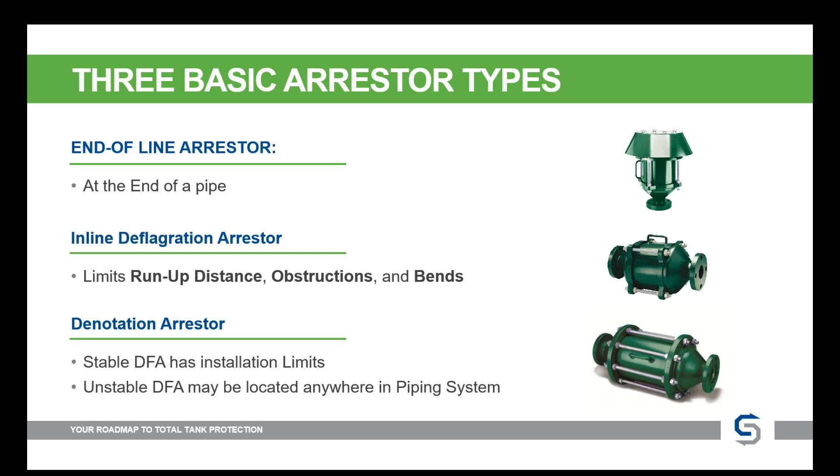There are other manufacturers out there who produce stable detonation flame arrestors, so you need to be sure that if you have a stable detonation flame arrestor, you're following the installation limits as well.

That final row before the operating pressure is basically saying how long a flame front can sit on that arrestor before it'll pass through. For the end-of-line flame arrestors, there's no run-up piping to consider, but it can hold a flame front for 5 minutes before it'll pass.

The ENARDO Series 7, our low-pressure deflagration flame arrestor, can have up to 20 feet of run-up piping—that's 20 feet between the ignition source, commonly the flare or some type of blower motor, and the flame arrestor. You can have 20 feet of pipe with up to one bend, and it'll hold a flame front for 5 minutes.

The high-pressure deflagration ENARDO Series 8 flame arrestors can have 60 feet of run-up pipe, and finally the detonation arrestor you can install anywhere in your piping system. It can hold a flame front for up to 2 hours before it'll pass through, which gives you more peace of mind knowing that regardless of wherever you install it, it's going to be able to stop that flame.

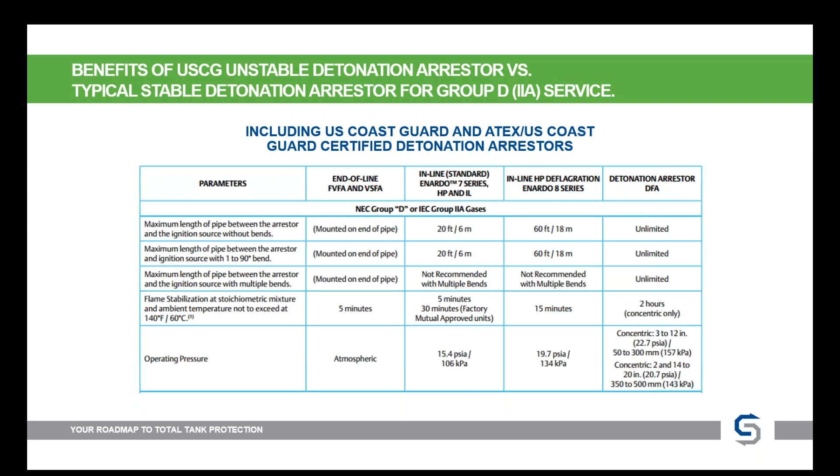You can see for the detonation flame arrestor, there's just a lot more of the cell—it's a lot longer. That's why it can last up to 2 hours before that entire cell heats up and allows the flame to pass. Also, it's much more rigid with how it's constructed, which is why it can take those higher velocities and higher pressures.

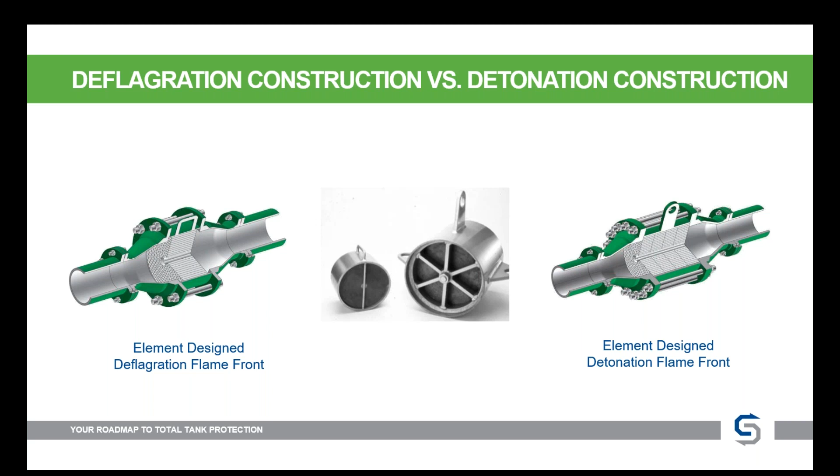When we're looking at flame arrestors, we have to consider the gas group of the vapor going through the line. There are NEC and IEC gas groups. Typically we use the NEC gas group, which is B, C, or D. These are determined by the maximum experimental safety gap, a test done by a standard body to figure out the largest gap where vapors can flow through without allowing a flame front to pass. Those tests determine what size of crimp we need in that metal element or flame cell, so based on what's flowing through your pipe, it'll be gas group D, C, or B, which sets the level of protection required.

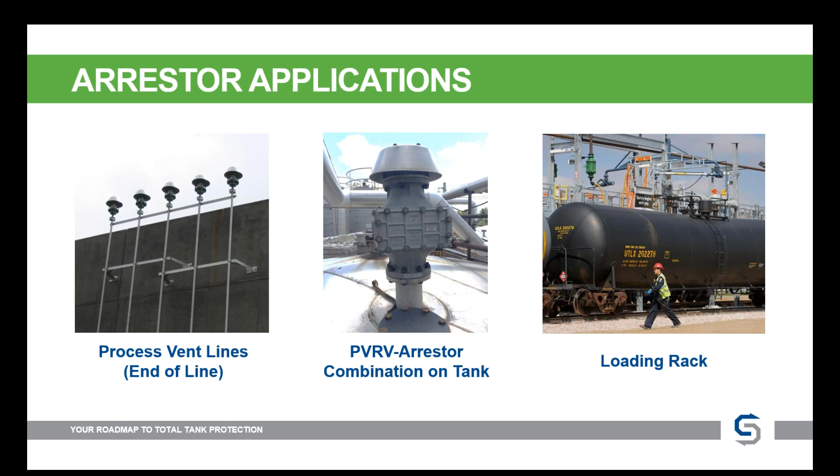Here are some examples of arrestor applications. On the left, we have end-of-line vents with flame arrestors on the end. In the middle, a conservation vent with an arrestor on it—actually a competitor's unit, just to show that this is a standard industry practice, not just something we do. On the right, a loading rack, where it's common to see flame arrestors all around.

The most common installation for anybody in biofuels or ethanol is the flare system. On the left, you can see a couple of flame arrestors on that flare system. It's also common to see them with vapor recovery—this is a marine vapor recovery skid shown on the right.

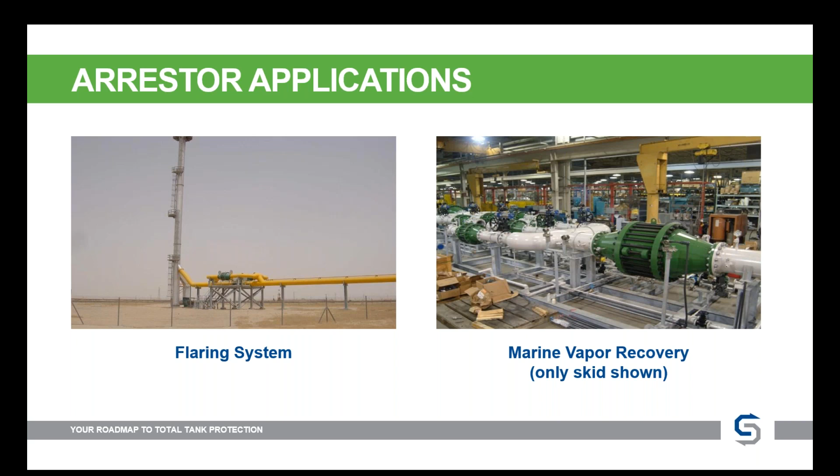One of the most important things to consider with flame arrestors is that while they are passive devices, you still need to monitor and inspect them. We recommend inspecting them annually so you can do a visual inspection to check for corrosion or wear issues. But for monitoring, the most important thing is pressure drop—by monitoring pressure drop, we can tell if that flame cell is becoming plugged.

When you initially install a flame arrestor, you should measure the pressure drop across it. We size those so it's minimized, and over time you'll slowly see it build up. As it builds up, you need to clean those elements, because any debris in there gives you a potential risk for a flame front to pass.

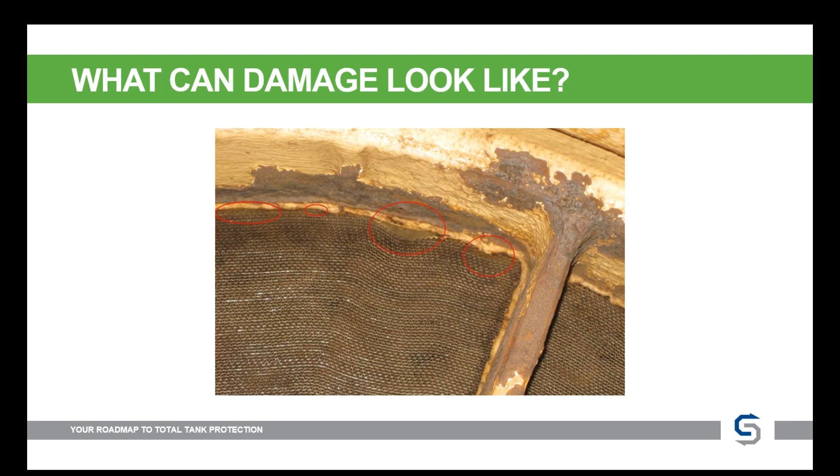They don't always happen on the edge—they can happen right in the middle of the flame cells. It just depends on how that flame front hits it, so it's important to give the entire thing a good look over.

When it comes to maintenance, cleaning the flame element or the internal piece is the most important step. You can use solvents, water, or steam, just about anything, and flow it in the opposite direction of normal flow so you can get any debris to wash out. You can clean them by just about any method other than trying to stick anything into the flame cell, so don't think you're going to take a piece of wire or a wire brush and clean it out.

You need to typically run water or some type of cleaner or steam the opposite way so that you don't damage those elements. Those elements are just stainless steel, so they can handle most chemical solvents, but you need to make sure there's nothing sharp that you're trying to shove down in there.

Then you need to replace the gaskets where the element seals tight to the housing, and tighten the bolts to the specifications shown in the manual. We always make sure to do a pressure test on them so that you're not leaking anything to atmosphere.

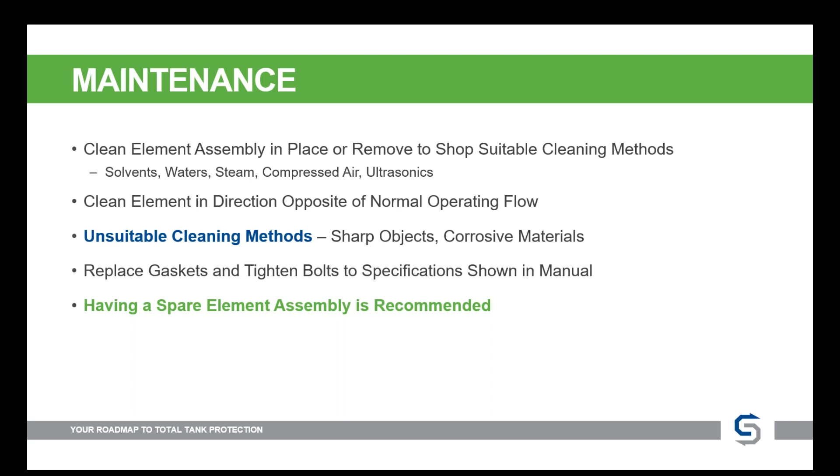It's also recommended that you can have just a spare element and swap those out, so basically you leave the flanges installed in the pipe. This way, if you want, you could swap the elements out and send it back to us. We can clean it, give it a once over, and ensure that it's up to code and still good to put back into service. So you can keep a spare element or an entire spare unit, and we can pressure test it for you and reassemble it with new gaskets.

So we threw a lot at you guys today, but everything that we talked about plays a critical role in ensuring your tanks are protected. I'm not expecting anyone coming away from this call to be an expert on this stuff, but we wanted to give you an intro into your tanks and the equipment that keeps them safe.

If you want to ensure total tank protection, we have two paths forward. If you want someone on your team to have in-depth training on these devices and know how they operate together, basically somebody that'll own this equipment within your plant, we are hosting a tank university on March 26th near Sioux City, Iowa, actually up in Dakota Dunes. This is a one-day training, very similar agenda to everything we covered today, but we're going to dive in deeper on each of the topics, and we'll have demos available for anybody who likes to get hands-on. I personally learn a lot better about actual equipment when I can get hands-on with it.

Another option, if you prefer us to come to you, we offer tank surveys. For these, we get a couple of experts to come to your site and review installations of all your tank protection equipment. We'll walk around, photograph each device, take notes about its condition and installation, get all the process conditions from your plant engineers, and then provide you a detailed report of recommendations based on what we see.

So with that, Lisa, I think we're going to open it up to questions.

Do we have to be shut down for you to complete a tank survey? No, you do not, actually. We'd prefer that you were operating so that we can see how all the devices are normally working. So as long as you keep everything live, we'll go ahead and run around. If we need to get hot work permits or anything like that, we typically have to go through those safety precautions, but we prefer that the tanks are live and that the process is live.

How often should I service my tank vents? I would start annually. If every year you're checking them and they look to be in good condition, then you could maybe back off. Or if you're finding a lot of debris or damage in them, then you should increase that interval. But starting with annually is a good starting point.

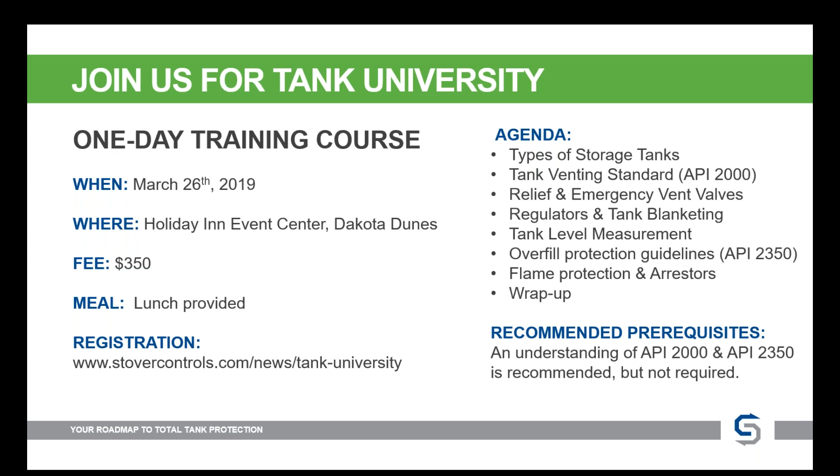Do all these principles apply to double wall tanks as well? That would be called out in API 620. So all these principles are for low pressure storage tanks. I guess I don't know off the top of my head if a double wall tank is low pressure, meaning 15 PSI or below. We'd have to double check on that one. So for that one, once again, feel free to get a hold of Paul Wagner and we'll double check that question for you. We'll put Paul's information back up on the screen. There it is.

Next question: what are the most common issues with conservation vents?

Typically, it's going to be freezing - that's the issue we see most commonly in this area, meaning Iowa, Minnesota, South Dakota, Nebraska, and Illinois. These areas can get hit with things like a polar vortex or a 3-day blizzard where moisture gets in and freezes the pallet to the seat. It's also common to see debris build up over time. So for any freezing or sticking, we like to go with ENARDO in this area, because PPS is our standard material, so there's no additional cost or lead time for it. We know it's good to negative 50 degrees and virtually nothing sticks to it.

I have another double wall tank question, Isaac, so I don't know if we'll be able to answer that, but Paul's information is still up on the screen if we can't. The question is, for double wall tanks, should the PV-RV connections tap on the inner tank or the outer tank? It's going to have to be the inner tank, I believe, but we'll want to clarify that one. Okay, great, so Paul's information is still up on the screen for that follow-up question.

We have a couple more here that we'll have time to go through. Can vents be serviced on-site, or do they have to be sent in? If you're working on a conservation vent on-site, if it's a design that has a cast-in seat, you have to come in with a lapping block. It's doable, just not very fun to do in the field, but that's how you machine that seat down to get a like-new finish. The ENARDO design, since it has a removable PPS seat, if those become damaged for any reason, you can remove them on site. It's a really simple rebuild, and then you replace the rest of the soft goods as well.